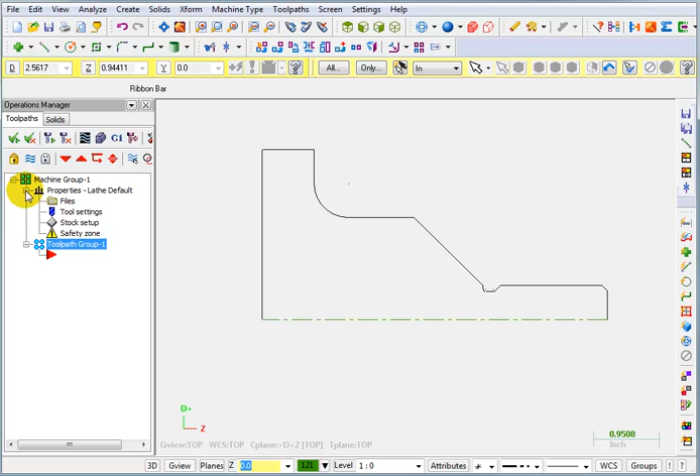We're going to go into the properties and define some of our tool settings. First thing you should put in here is your program number, whatever 4-digit number you want to use. We're going to tell it to assign tool numbers sequentially, and I'm going to use tool's step, peck, and coolant. Now in some cases you might have a custom tool library that has the same tools in it all the time, and maybe you don't want it to assign the tools. Maybe when you pick from your library, the roughing tool is automatically going to be tool number 2, and that's the way you want it, so you wouldn't have to turn that on. But we're going to be pulling from the standard Mastercam tool library, and the first tool that we pick, we want it to be tool number 1.

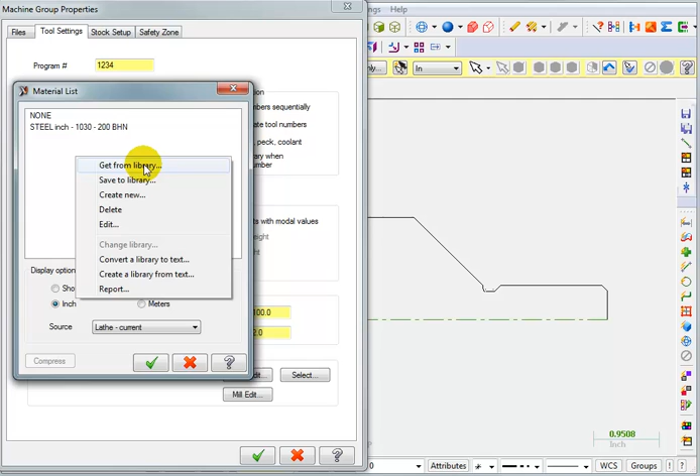We can go select a different material type if you like. We'll say select, I'll right click and say get from library. We'll grab some steel 1030 - you can pick whatever you like. So that's my currently selected material, and I'll tell it to calculate my feeds and speeds from the material.

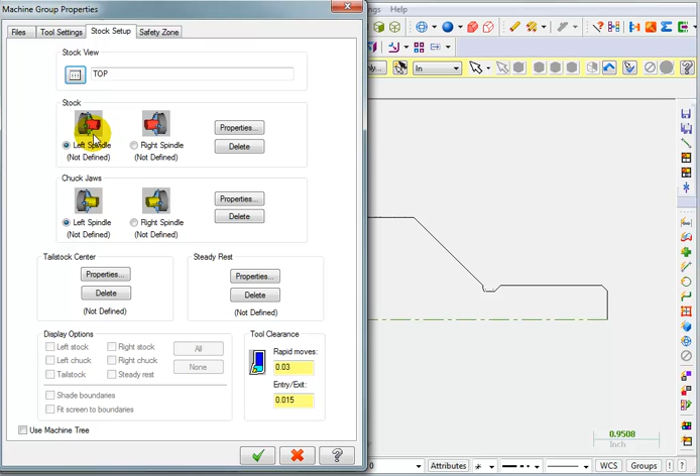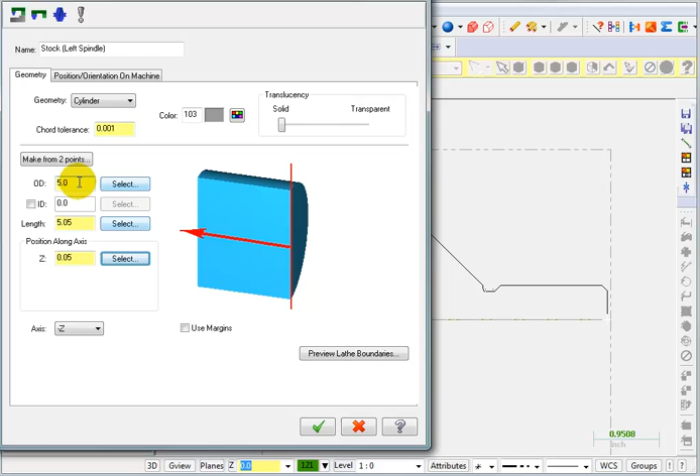For my stock setup, I want to define the stock for my left spindle. We'll go to our properties, and I'm going to define this using 2 points. So I'm going to pick a point at the front nose and then pick this point at the far outer diameter. I'm going to make the length 50 thousandths longer and then add 50 thousandths stock to the front of my part for facing. So we'll say that the blank we're going to be using is 5-inch diameter, and we're just going to leave it at 5 inches. So we're not actually going to be turning this outer diameter here. We'll OK that.

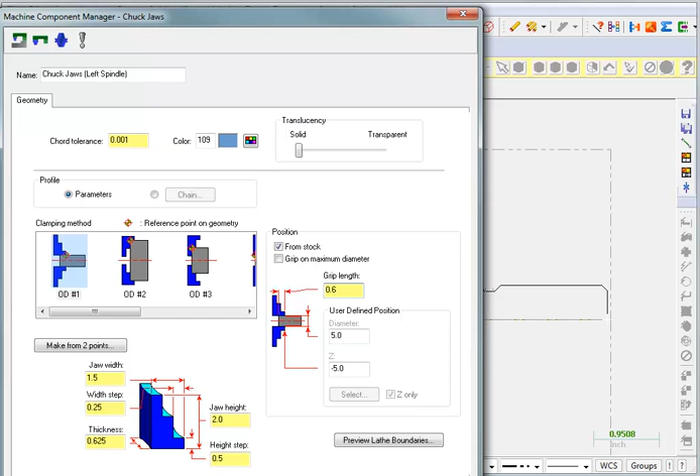For our left spindle, we're going to define our chuck jaws. Go to Properties, this time we'll use this style of chuck jaw. I want it to grip onto the stock, that'll get me my diameter. And I want it to grip onto about 600 thousandths. We can preview that, and we can see that that'll give us a good grip on the part and still give us some clearance from this area where we're turning. Press enter to continue, and we'll OK that. Remember, you can use the shaded boundaries, and we'll say OK.

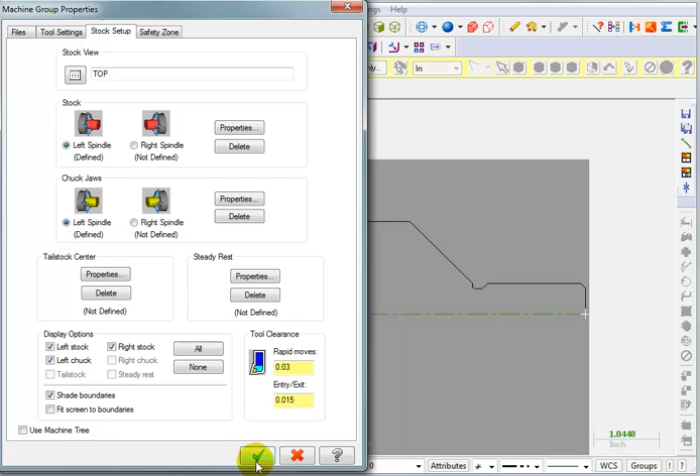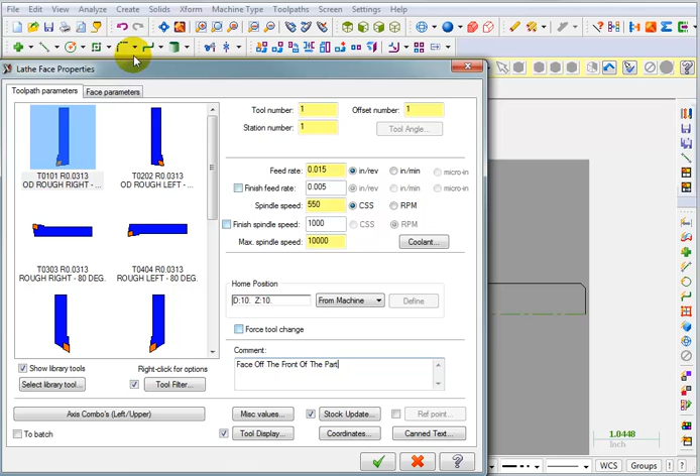So now we're ready to do our first toolpath. We can go to Toolpaths, Face. It's going to ask us for our NC program name, and mine is just going to come up with the same name as I named the part when I saved it. I'll OK that. I'm going to pick this tool, it's a CNMG 432 to rough my part, and I'm going to add a comment - I'll say face off the front of the part. For our facing parameters, it's going to be using the stock. I'm not really taking rough cuts because there's only 50 thousandths on the front, so we're really just going to take one cut, and we'll OK that. So there's our facing operation.